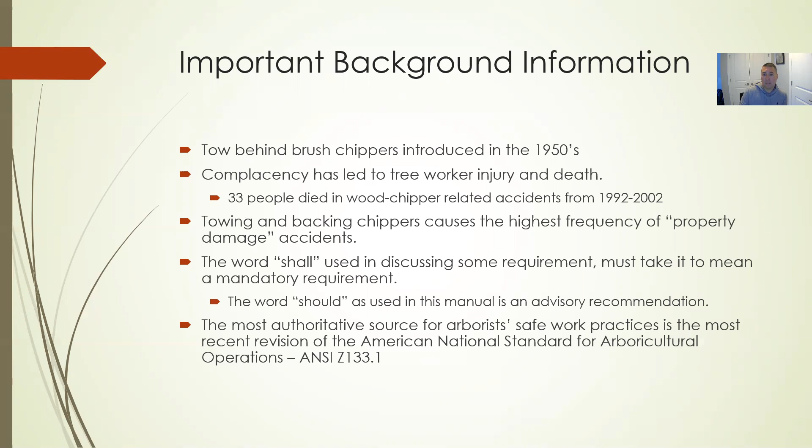Okay, what types of chippers are there? There are three types: rotary drum, disc chipper, and mechanical drum chipper. A rotary drum chipper feeds the brush directly into the cutters. Its design has been around the longest, and it's ideal for smaller diameter branches.

They're just trying to give a little demonstration here of how it's working. Let me see what I can pull up to show this properly.

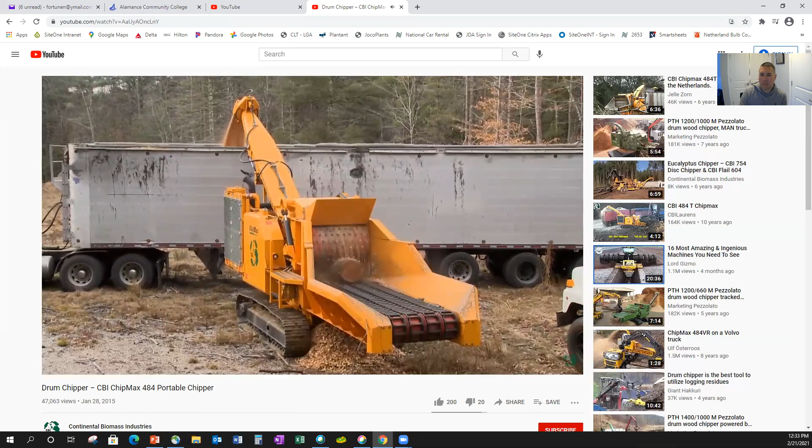All right, so with a rotary drum, he's feeding it in -- I don't know how big that branch is, maybe 10 inches at most. Let's see how he's feeding that in. It has the drum there in the middle of it, right, and he's feeding that into the chipper.

A disc chipper uses hydraulic power feed wheels to pull brush into the cutting flywheel, which has knives mounted on it. Okay, let's see if we can get the bandit model pulled up -- this is a disc chipper.

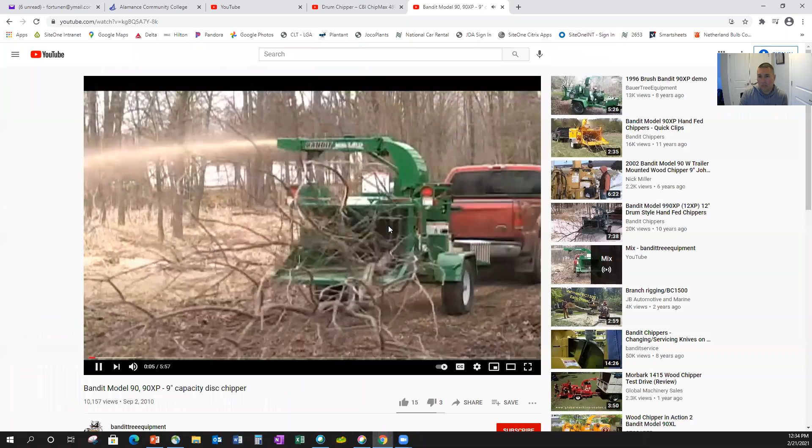Okay, so disc chipper. How he's pulling it in, it's not feeding if the rotating wheel is not on there, and it's pulling it in there. So you're feeding it in, pushing that brush in there, and it's pulling it in as it's coming through. You can kind of see from that last one, the discs are in there. There's discs, not necessarily that rotary drum that you see here, that big drum, okay?

Mechanical drum chipper uses hydraulic power feed wheels to pull the brush into a spinning drum with knives mounted on it, okay? Let's see if I can bring that one up. Mechanical drum chipper.

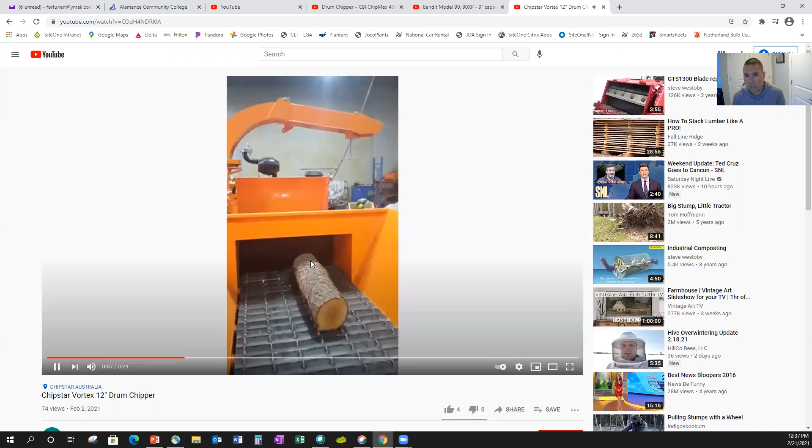Okay, so see how that one's pulling the feed wheels in, the drum is on the inside there, and then it has the bed knives on there. So this one's pulling it in. It's similar, same as this one, but that drum is on the exterior, so you don't want to necessarily be right up on that thing and feeding it in manually. You want to be able to, when you're feeding it in manually, this thing is enclosed, it's up further away, it's pulling it into that chipper.

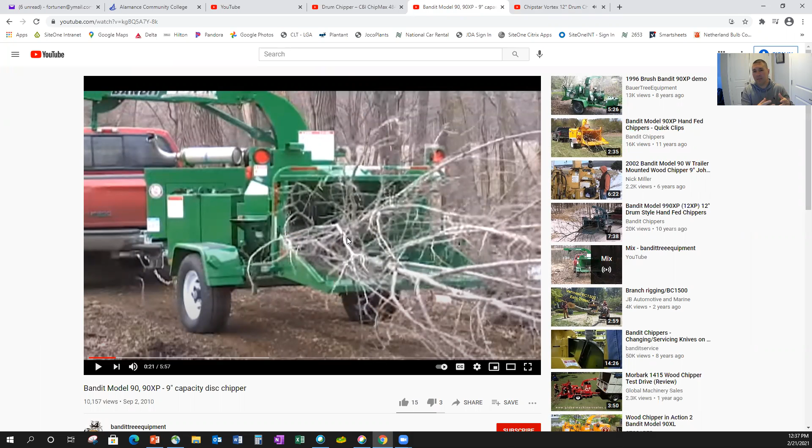Similar, same where you have this chipper here, it's pulling it in, that mechanical arm is inside of that chipper doing the work, not on the exterior. As it is on the exterior of this one, you want to feed it in with something different, because that's what's going to keep you safe on that aspect, okay.

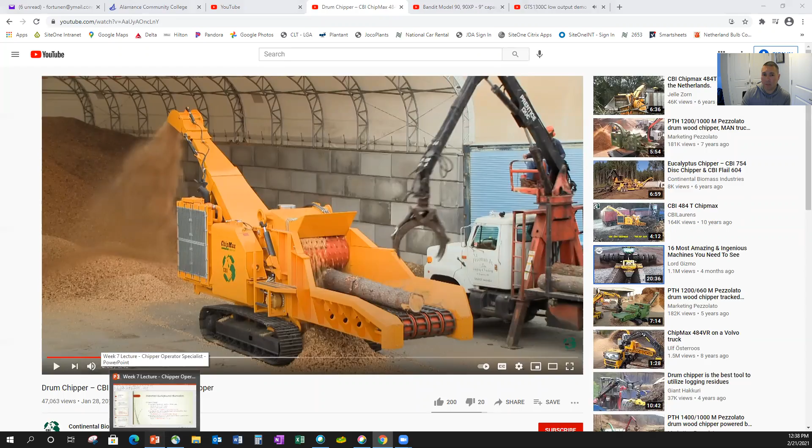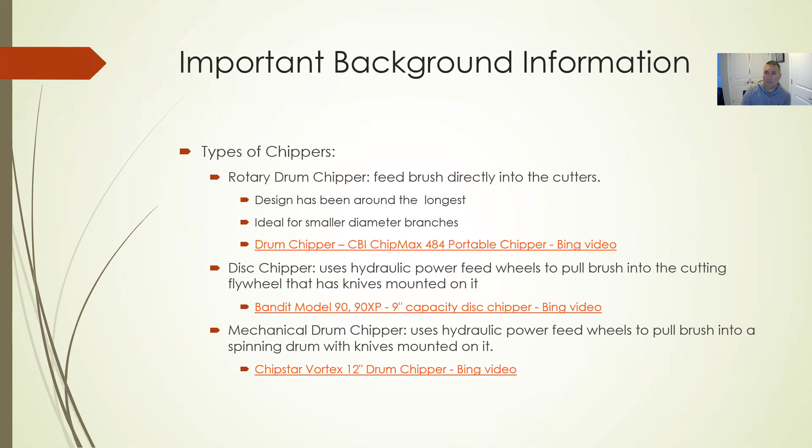So let's continue back here. Okay, so that kind of gives you an idea. Rotary drum, disc chipper, mechanical drum chipper. Main differences: rotary drum, you're going to feed it in. Disc chipper, it's going to pull that brush into it, and you're going to feed it in there as well. Mechanical drum uses the hydraulic feed wheels, which is like that conveyor belt that's going to pull it in, and it's going to pull it more into that inside protected area of the chipper.

So as a user, per the Z133.1 rule book, we're going to remember that, but you got to pay attention to the wording. The chipper shall be maintained with manufacturer's safety devices, instructions, decals, and other safeguards, and workers using them shall follow instructions provided by manufacturers. Rotary drum chippers not equipped with a mechanical infeed system are equipped with an infeed hopper not less than 85 inches measured from the blade or knives to the ground level over the center line of the hopper. So there's a distance that it has to be in order for it to be safe, that's basically what it's saying.

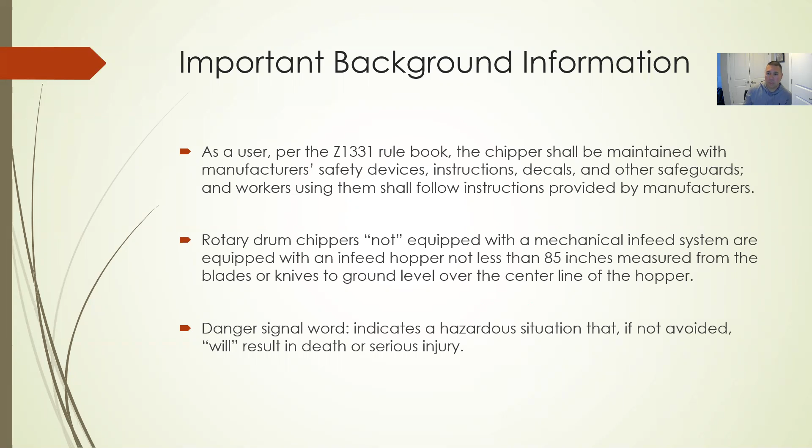But pay attention to what it's also saying, because test question, okay, helping you out here. Going through some of these test questions, refer back to them. The danger signal word, which we all know - danger, warning, caution, all those types of things. Danger indicates a hazardous situation that if not avoided, will result in death or serious injury.

Just some important safety things, this is out of the book as well. A couple things: you have to have your protective equipment. Use your eye and ear protection. Don't forget the hard hat, the gloves, and the long sleeve shirt. Not a face shield - eye protection, ear protection, okay.

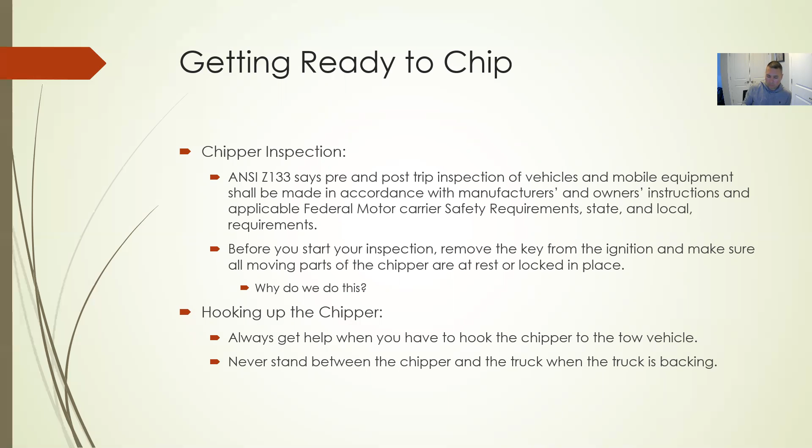Okay, driving and backing with the chipper. Remember, pulling the trailer weighing several thousand pounds will increase the time and distance it takes to stop. Okay, pay attention to this. This is a little tricky. Just flip back and forth, trying to make sure you get it right on the quiz here.

So a car or a pickup you drive to work needs a 3-second space cushion on a low speed road. Okay, so your average car, your average pickup needs a 3-second space cushion on a low speed road.

A truck with no trailer needs 4 seconds, right? So a larger dump truck, landscape body truck, those types of things needs 4 seconds.

So a tractor trailer or a truck with a heavy trailer needs 5 seconds. Okay, so if you're taking a tractor trailer along with a trailer behind it, a truck with a tractor trailer, or a truck with a trailer, all those things, it's 5 seconds. Okay, so you got 3, 4, and 5 seconds depending on what you're driving.

Be careful on that one. It's a little tricky, but you got it. You can figure it out.

Backing up, one of the most common types of accidents with chippers occurs when someone attempts to back into position without a spotter. Stop if you lose sight of the spotter, and the spotter should have eye contact with the driver at all times. You're looking in the rear view mirror, the side mirrors, trying to get that one-on-one contact as you back up. If he can't see you, you can't see them, vice versa. So if you lose sighting of them, you need to stop, figure out where the spotter's at, and continue on.

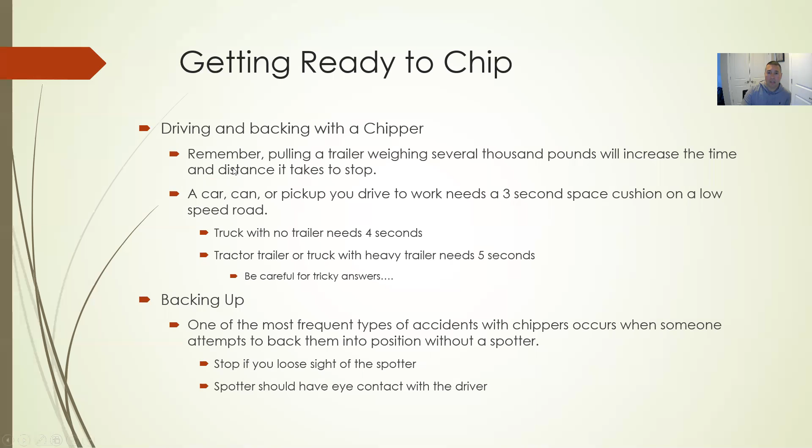All right, so setting up and positioning the chipper. Proper placement puts the chipper as close to the work as possible, but keeps both the operator and the machine out of harm's way. You don't want to be dragging brush 18 miles down the road, but at the end of the day, you can't be right on the work site either. It needs to be far enough away so you have enough room to work, enough room to fall your trees, whatever the case is. You still need enough room.

Your chipper work area - we talked about work areas with chainsaws last week, similar idea behind these. Your chipper work area is right behind and usually to the right or curb side of the chipper. If you're dropping trees, it's on the curb, on the right side. This is where the workers will stage your brush, keeping enough space before feeding the chipper. So if your chipper is here, you're behind it, you're to the right, on the curb side, before you feed, that's where you're staging your brush piles.

Minimize trips and falls while dragging brush by keeping the chipper close to the work tree area. The further you have to pull the stuff, the dirtier it gets, the more untidy it becomes, and more slips, trips, and falls happen. If it's too close, you can be struck by a falling tree or a misplaced tool. So not too far, not too close - though too far is probably better than too close. You need that happy balance.

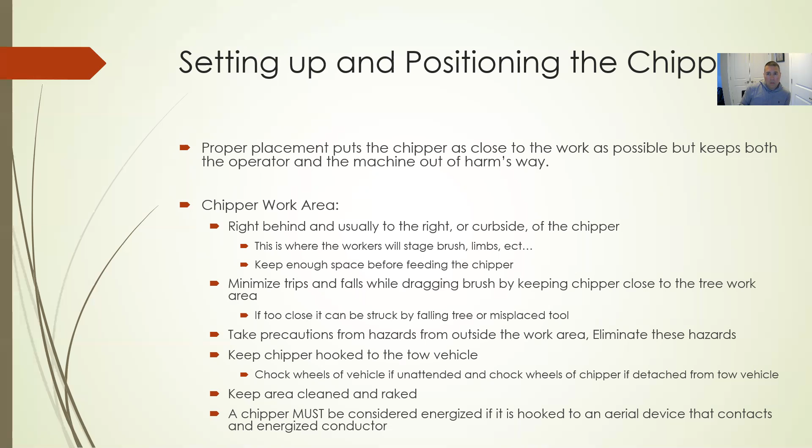Temporary traffic control: tree care operators, before your crew can get to work, even before it can do its hazard assessment and hold its job briefing, you have to establish control of pedestrian and vehicular traffic around the job site. Once you pull up to the job, you get out of your vehicle, you need to handle the pedestrian and vehicular traffic with cones, whatever that is. If you have to pull to the side of the road, you need to face the traffic flow - that's the rule of thumb. Don't pull up to the job site, get out of the truck, walk around, look at the tree, and mess around on that aspect. You need to take care of the traffic and pedestrian aspects right then and there, then go do your site inspections and get your crew its assignments.

So when your vehicle or work area impacts vehicular traffic, you need to employ temporary traffic control zones, with measures conforming to the U.S. Department of Transportation Manual on Uniform Traffic Control Devices. There are standards that you have to abide by when you are doing traffic control - that's what this is saying. We're not going to get into that aspect of traffic control here.

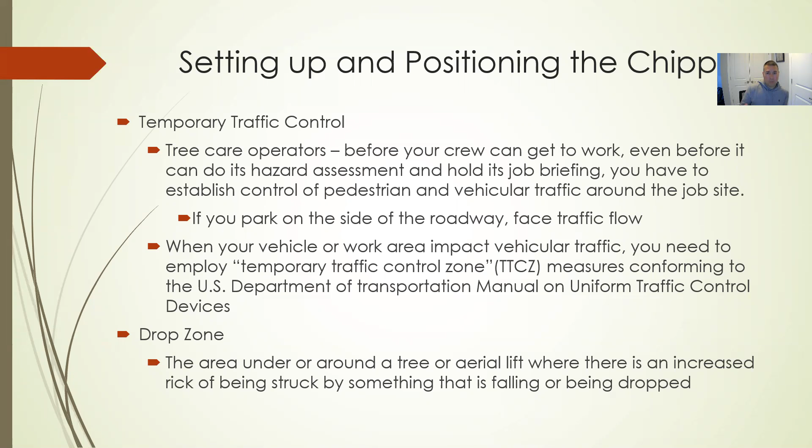Drop zone. We learned about drop zone a little bit last week too. That's the area under or around a tree or an aerial lift where there is an increased risk of being struck by something that is falling or being dropped. You don't want to set up in that drop zone. You want to set up outside of that drop zone for your chipper.

All right, running the chipper. Before you even start the chipper - we'll talk about running it, but before you even start it - these are the things you have to do. Pay attention. I think you've got to know at least three of them.

The clutch is disengaged. The chip discharge chute is clear and pointed in the safe direction. The chipper hood lock pin and hood bolts are secured. The in-feed hopper is free of tools or foreign objects. The feed bar is in neutral. Personnel are clear of the machine, and personnel are wearing appropriate PPE.

Okay, so these are all kind of - I want to say common sense, because common isn't common to everybody. These are the types of things that you would do before you started your vehicle, right? I mean, your parking brake is on, the thing is in park, the doors are closed, right? All those types of things are what you would normally do. A chipper is the same aspect, right?

The clutch - as soon as you start that chipper, it's going to start spinning, so you want to disengage the clutch, right? Make sure the chute is clear. You don't want to have something in the middle of the chute when you start the chipper up, it's going to blow that out. That being said, you want it to be pointed in the right direction. When you start it up, you want to have that chipper chute pointed in the direction that you want your chips to go. Everything needs to be locked and bolt secured, right?

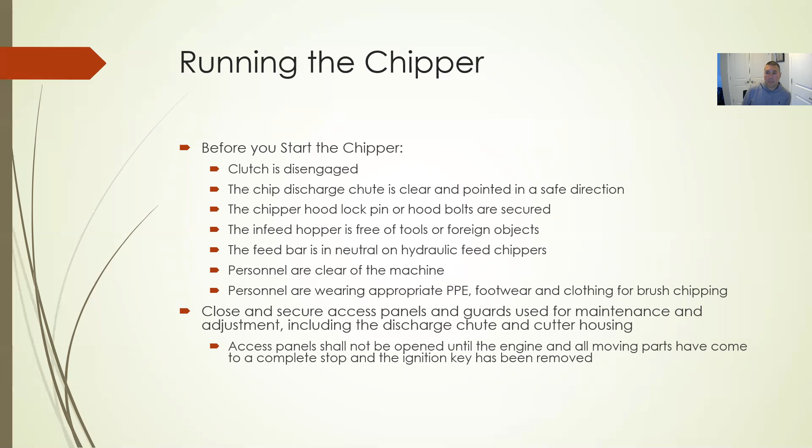So starting the chipper: idle the engine to warm it up, and then slowly engage the clutch, raise the engine RPM to full throttle, and check the operation of the feed bar and the hydraulic feed wheels.

You need to know those. Pay attention to those. Before you start it, idle it up, let it warm. Start it up, let it warm up, engage the clutch. That's going to start the wheel. Then push your throttle in, right? And then you check the operation of that feed bar.

Put that feed bar up, down, whatever the case is, then that should engage that feed wheel. An operational check of the chipper safety devices should be done prior to chipping brush. So you need to double check it, right? Just like we do with any of the other equipment we've gone over.

Operating the chipper, always feed material from the side of the in-feed hopper, right? So you never stand behind it. The hopper is here, you're feeding stuff in it, you always stand to the side and feed this stuff in. Feed it from the side so you can avoid being hit by the flow of material into the hopper. If you're behind it, next guy's pushing stuff in, next guy's pushing stuff in, eventually someone's going to get something caught - shirt, glove, arm, whatever the case is.

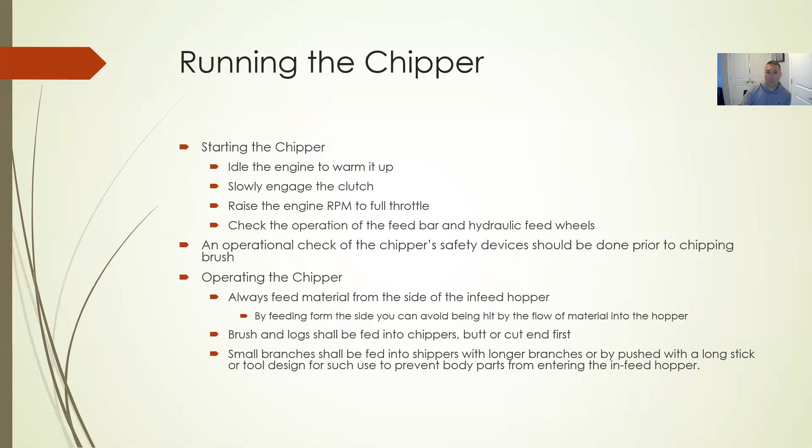Stacking brush - don't create a hazard. If it's not being chipped immediately, stack the brush so the work area remains clear. Make it easy to feed into the chipper with the butt end towards the hopper. So you just want to keep it clean, keep it neat, stack it up decent.

Sounds like a pain, but it's really not a pain because it makes it easier when you're feeding the chipper. Plus it keeps the area safe.

Feeding the brush - always feed the large or butt end of the branches into the chipper first. What you've been cutting goes in first. It pulls the rest of that loose, limby, leafy stuff in after it. You don't have to worry about fighting with that.

It's easier to grab it by the butt end. It doesn't have all the leaves and branches and twigs on it. Get that in there, get it started, allow that chipper to suck that thing in there and pull it in to chip it up.

The feed wheels will open to allow smoother operation. Feeding the wrong way, branches can get wedged and they'll catch on the edges of the feed chute. So you just don't want to be trying to put a big branch with a whole bunch of leaves through a small hopper. That's a lot of work to try to scrunch it up in there.

And if you're doing that, you're exposing your limbs, your arms, your fingers into that hopper closer to try to corral it in, to shove it in that way. Just turn the thing around, shove it in there, let the chipper do the rest.

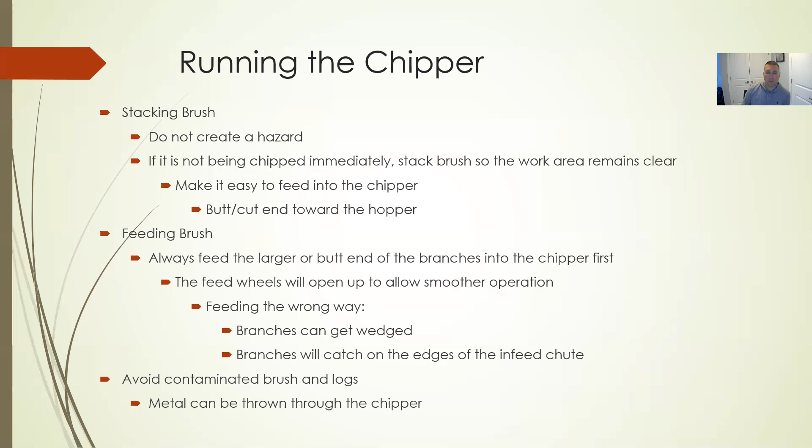Worst case scenario, it can poke a hole into whatever the back of the dump truck is - all those types of things. Very dangerous with that. The wood is not - it's lighter, it's not going to do that type of thing. But if you put a piece of metal, something hard through there, it's going to shoot it out, just like a bullet. It could puncture wherever that chipper is pointed to.

All right, chipper maintenance. When we're talking about chipper maintenance on this stuff, these are things that you're going to do in the field during the day to keep the machine operating, like clearing a jam. That's what we're talking about when we're doing maintenance, not talking about oil changing, those types of things.

Hazardous energy. This is a little tricky too, I have to help you out a little bit, but just pay attention to what it is. Hazardous energy can be electrical, mechanical, hydraulic, pneumatic, chemical, and thermal. Mechanical energy is most common with brush chippers. It's the potential of what energy is, right? So the energy is in that drum, in that wheel, in that disc, all those types of things.

That's where the energy is, and that energy is getting ready to happen when you turn it on and feed in that brush. The danger with the release of the stored mechanical energy when working on a chipper, that's the danger of that release. So the release is when it starts moving, kind of like a mousetrap. The danger isn't while it's set—well, the danger is when it's set, but the danger really comes when you set it off. So it's that mechanical energy when it's ready to release. When the mousetrap is done, there's no energy there anymore, it's already done, it can't do any more harm. So the mechanical energy on that chipper is when you turn that chipper on and you put a log through it, it's going to start chewing it up.

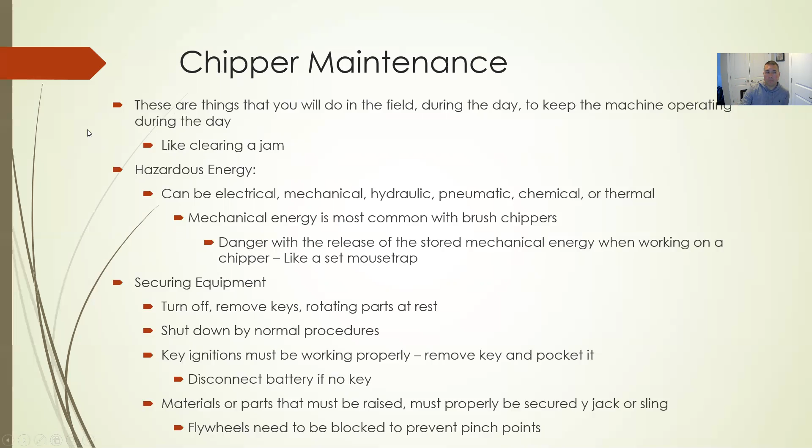Hydraulic leaks. Do not go near hydraulic leaks, do not use your fingers or your skin to check them, because they're hot. If that chipper's been running, any piece of equipment for that matter, and it has hydraulic fluid, it's hot. So here's a little hint: you can hold a piece of paper or cardboard near the suspected leak to see if it's leaking—it'll obviously show up on that piece of paper.

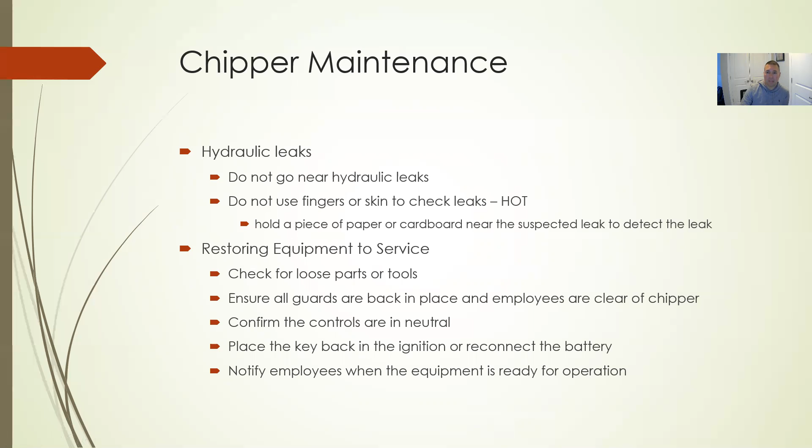Restoring equipment to service. Check for loose parts or tools, ensure all the guards are back in place, confirm the controls are in neutral, just like we said when we were starting it up. Place the key back in the ignition and notify the employees when the equipment is ready for use. So once you've fixed it and you're going to put it all back together, you just need to go back to the beginning—make sure everything is tight, locked down, in neutral, keys in the right spot, and you let people know we're getting ready to do it again.

Never turn the cutting system manually unless the ignition is shut off and the key is removed. You may have to turn it manually in order to unstick a branch or a log, whatever the case is, so you might have to take your block out of it, or your wedge out of it, to do that. But don't do it with your hands, do it with a stick or a tool, okay?

Make sure the belts have proper tension, check the engine fan for cracks—those are things you can visibly see. If the chipper sounds as if it's not working properly, shut it down immediately and seek help from a qualified mechanic. If something isn't right, doesn't sound right, sounds weird, it's better to be safe than sorry. Your mechanic may make fun of you when you bring it back and there's nothing wrong with it, or it may be a loose screw on the side that was rattling and you've never heard it do that before. But at the end of the day, everybody's safe, everybody's good, no harm, no foul.

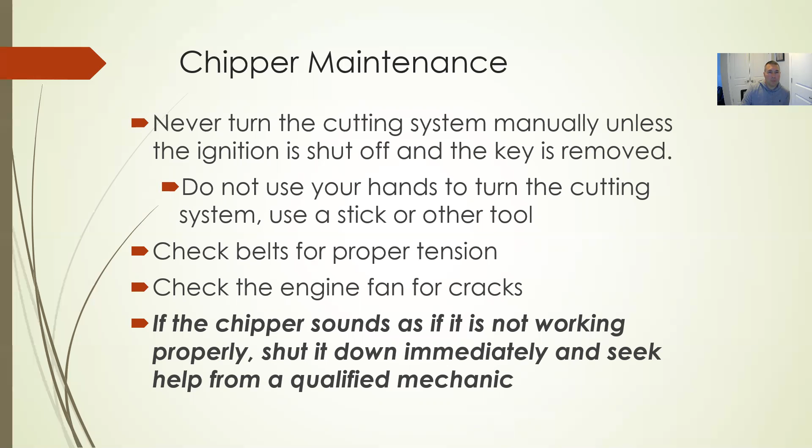Imagine if you don't go back and check it, and something is wrong, and then we cause damage to a vehicle, a person, property, whatever the case may be. Then you say, why didn't you check it? Why didn't you stop? Why didn't you do this? Well, I just thought it was a loose screw, I didn't think anything of it. So all those things can go back and forth. You just need to pay attention, know the proper sound of it, know when it doesn't sound right, all those types of things.

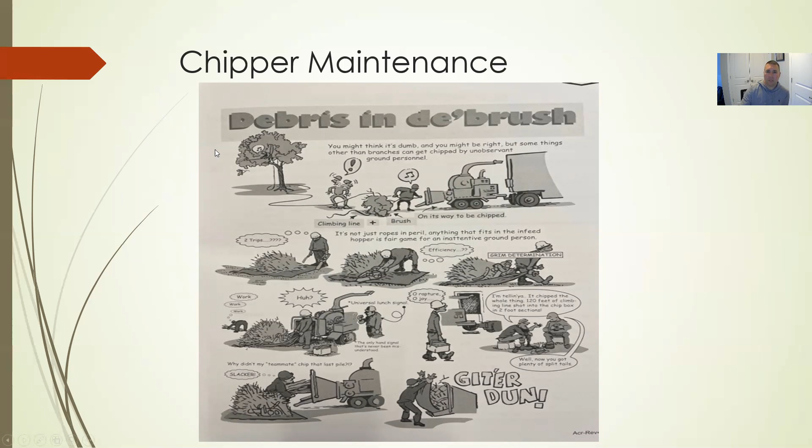All right, using the chipper's winch. That's the last chapter. Some chippers will have a winch on it, so you can pull a large log up to the chipper and get it chipped, something that you can't carry. It can also be used when you don't have a piece of equipment around. All those types of things.

Okay, so when you're using a winch, not only on a chipper, these are things that can happen, right? Serious accidents can happen. The winch line can get caught and fed into the chipper. Metal hardware at the end of the winch line can recoil at high speed. The winch can be overloaded, and the metal hardware at the end of the winch is fed into the chipper. So all these things, just pay attention.

Test question: two can happen when you're using that winch. So don't overload it, don't think that it's not breakable, all those types of things. Whether your actual cable doesn't break, the hooks on the ends, the latches on the ends, all those things can break just like the cable can. Just because the cable's not breaking doesn't mean those things won't break, and vice versa. Those things may not break and the cable may break. So all those things to think about.

Winch systems shall be used only as intended and instructed by the manufacturer. So once again, pay attention to the instruction manual. Pay attention to what they're recommending and what it's intended for, from the manufacturer, not from Joe Jimmy or your mechanic or whatever the case is. It's actually in the instruction manual, that type of thing.

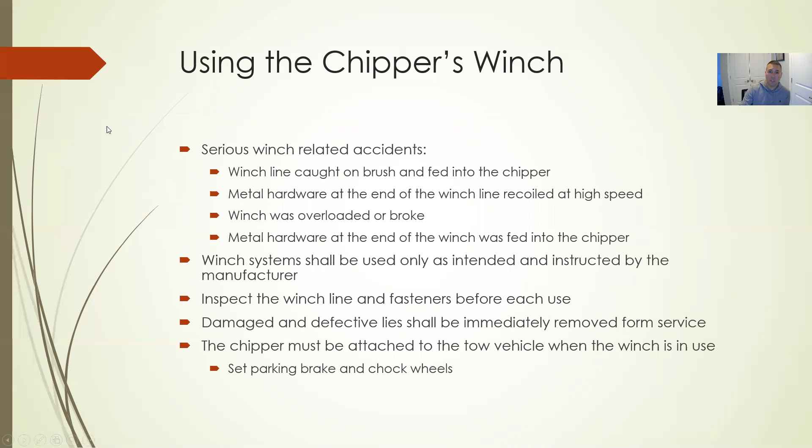The chipper must be attached to the tow vehicle when the winch is in use. Set the parking brake and chock the wheels, all things to pay attention to, right? You want the chipper hooked up to something else if it's pulling a log that you can't even move by yourself. That's going to pull, the force of that is going to pull that chipper. So you need to make sure that it's properly chocked, parking brake is on, all those types of things, hooked up properly. Okay, using the chipper's winch.

Again, the tow vehicle should never be used to pull the winch line and the attached load. So don't hook the winch line up to the vehicle so the vehicle can pull more than the winch line.

Pull loads from the side requires special equipment and techniques. If you're going to pull your chipper and it's not directly behind you, you're going to pull it from the side. If you do that, your chipper is going to want to move in that direction. There's a way to do it, but you need to be trained for it because you need the right angles.

So there are 6 steps to use your winch: deploy the winch line, hook up the limb, winch the limb to the chipper until the butt end rests on the feed tray, slacken the winch line and reattach it further down the limb, winch the limb until the butt end engages in the feed rollers, stop the feed rollers, detach the winch line, and chip the limb. Basically, hook up your tree, bring it to the chipper, unhook the winch line, get the piece of wood onto the chipper rollers, take your winch line off, and then chip it.

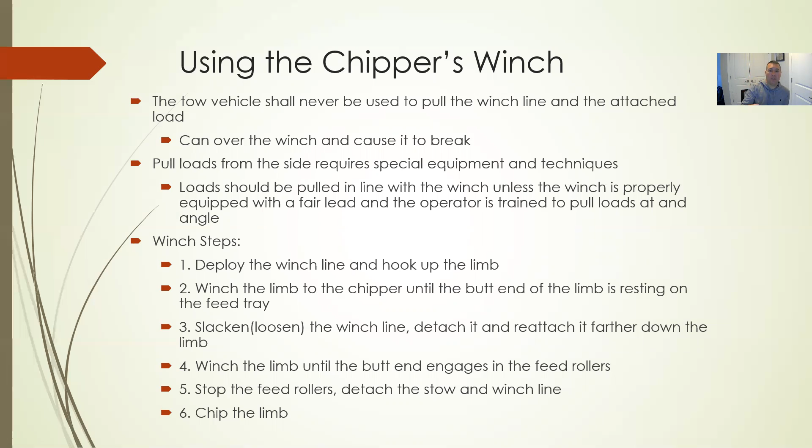Oh, is it gonna work? Turn that one down. All right, let me see.

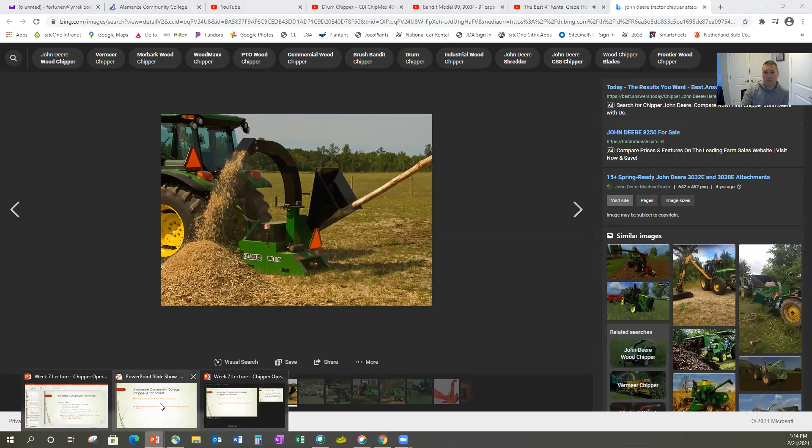And then I have another link - I'm not going to go through this. It's about a 30-minute video, but it was a pretty neat video on chipper safety. I think it's from Vermeer - Vermeer's a pretty well-known chipper manufacturer. They have their own safety video with their own type of equipment.

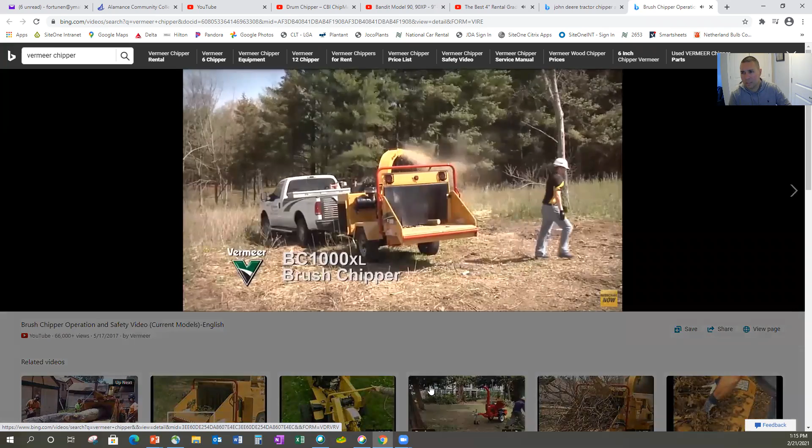See how he's feeding things from the side and moving, with his equipment on, all those types of things. He has a pickup truck in that video - there's an idea with the winch log. I just thought it was a good video to attach to the slides. You guys take some time, take a look at it. It's pretty resourceful. I'm not going to go through it or watch it, but I hope you guys find it useful.